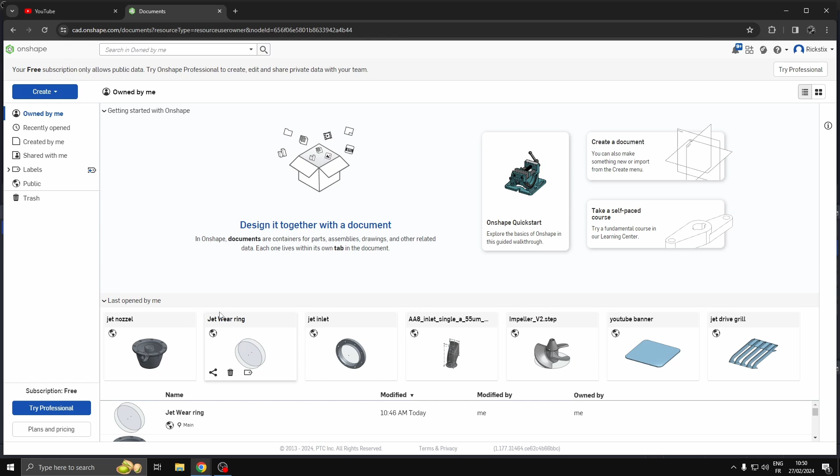Make sure you rename your sketches and planes, because it gets very long and hard to tell which is which. I've just created another plane here, front diameter, slightly smaller because it tapers ever so slightly, but I've got to test one of these out after.

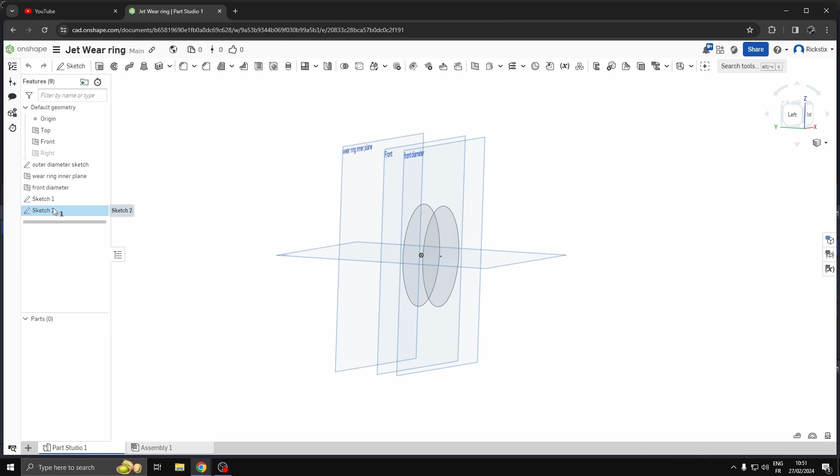I've gone into sketch 2 here, and we're already on the plane, and I just want to match the size, 6.8. Back into sketch, center point circle, click on the cube to realign yourself, just draw your circle, click off, then put in the dimension.

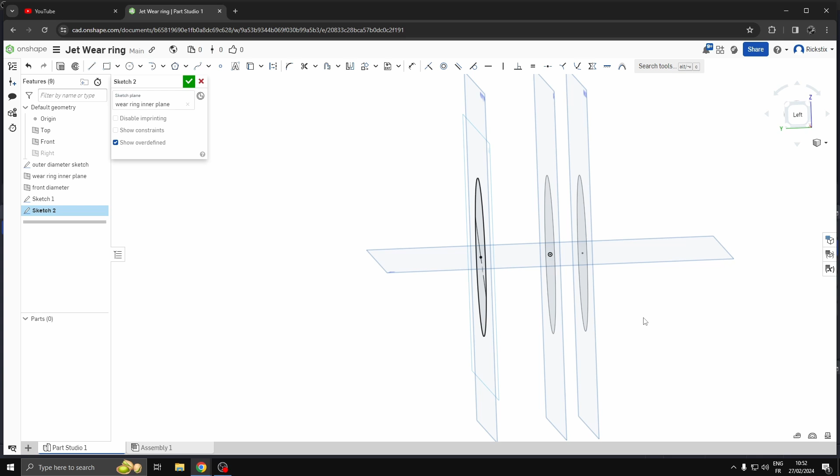I've basically got inside the jet drive about 3 centimeters going in, and 1.4 centimeters coming into the nozzle with an ever so slight taper.

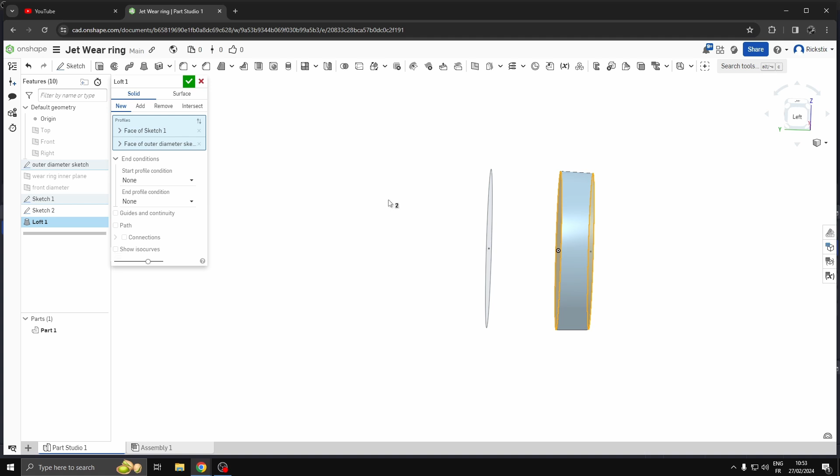We're done with our sketches now. I'm just going to hide the planes quickly. Let's try a loft, see what happens. Okay, that's our first little loft - you see that slight graduation there. Okay, we'll do that one loft like that.

Another loft from the rear plane, from the edge, and we've added our straight piece, so the impeller can be nice and straight in its housing there.

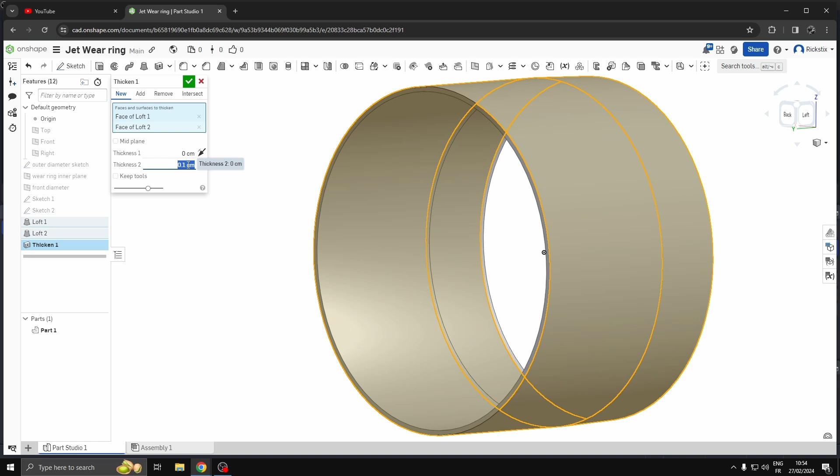If I come back to here, I'm going to go to thicken, 1 millimeter thick. We'll live with that for now. The inner diameter will hopefully be correct for the impeller I'm going to be printing.

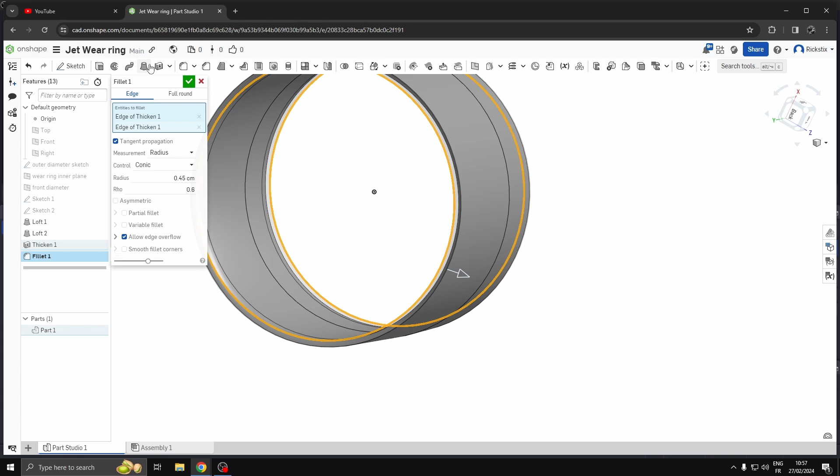We're going to fillet this front edge as it goes into the jet nozzle - I want this to be flowy. We'll try that and give it a go, guys. I've designed myself an inner bearing for a jet drive.

I'm going to export this out. I'm keeping it in millimeters, so I'm exporting that now. I can go straight in here.

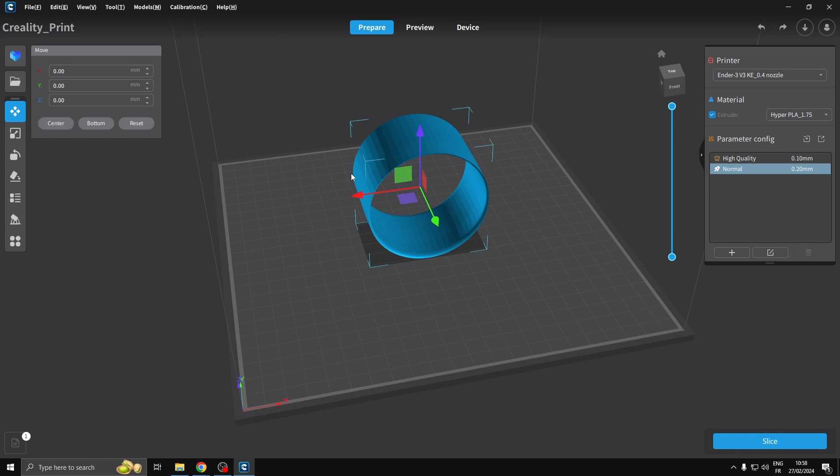Okay, there it is, now we're in the Creality print software. I might as well take you through a few things. It'll give you the part already laid out however it was laid out in Onshape or whatever program.

Down the side here you've got a few options. I normally choose what side I want up - so this will be the bottom, going straight and then into that taper. Okay, so we've got that going on.

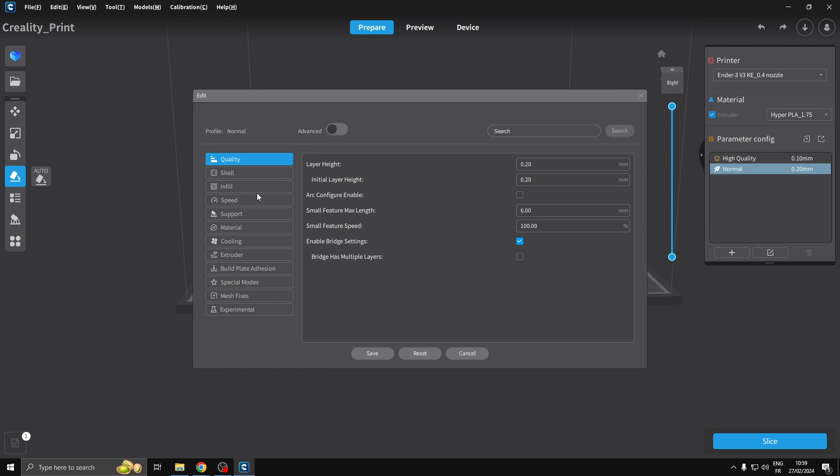Then you can add supports - this doesn't need them, but you could use automatic supports. I prefer going into edit down here, where you've got all your settings: quality, shell, infill. Now I'm going for a density for the bearing.

For the first test I'm going to keep it at 5% infill - I'm not sure it's going to do a lot of infilling. Let's move that up to 15 just in case it infills between. We'll go with lines, and then speed - I can go fairly fast, 150, I'll keep that on.

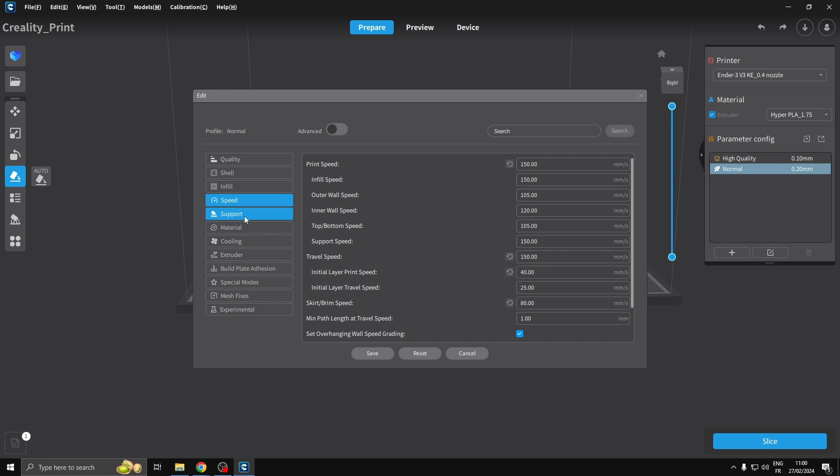Supports, I don't need them. Materials - that's your temperatures, I'll keep it at that, and 60 seems to be okay. Cooling, you've got it all in here.

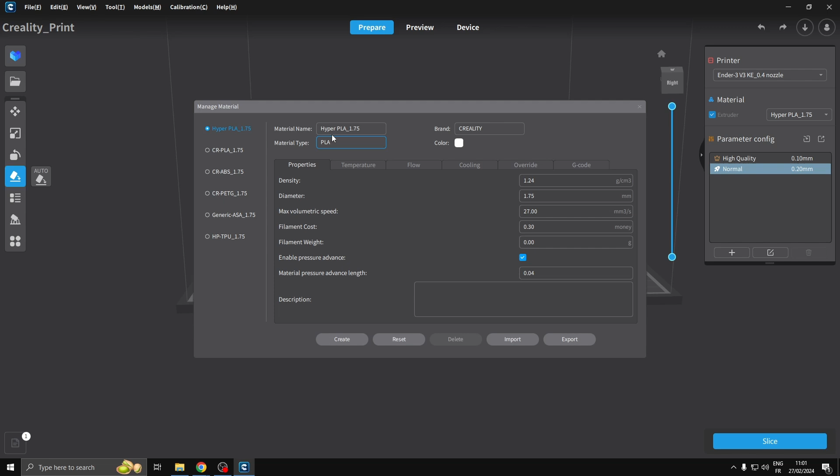Make sure you save. Go into this little edit button here, that'll take you into your settings. If you're choosing PLA - I'm on hyper, I've changed it - but you've got different settings ready to go. If you go into managed, you've got even more options with the PLA flow.

This is kind of important. Anyway, I'm going to keep it on hyper PLA, it's just normal PLA, but it seems to work for now - I'm getting decent results. So if it ain't broke, guys, don't fix it. And then up here, Ender 3v3, you've got your actual printer.

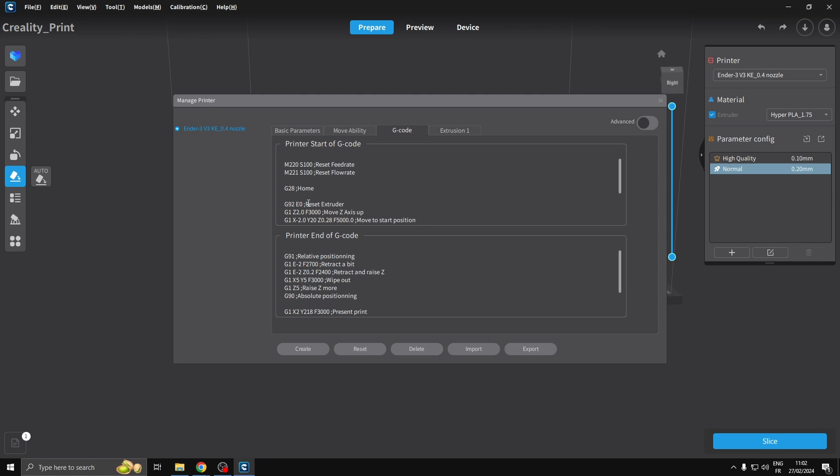You can manage the machine itself - you've got your G-code there, you can write in some different stuff. Extrusion, nozzle size, nozzle diameter 0.4 - that's important to make sure that's set right, depending what nozzle you're on.

These are kind of quick settings down here. Others is quite good when you want to mirror something - you've got your mirror tool. Drill, I haven't used. Distance, measure some stuff - it's all there. It's quite a good little program, seems to work well. It's already got my Ender 3 V3 KE profile, so that's cool.

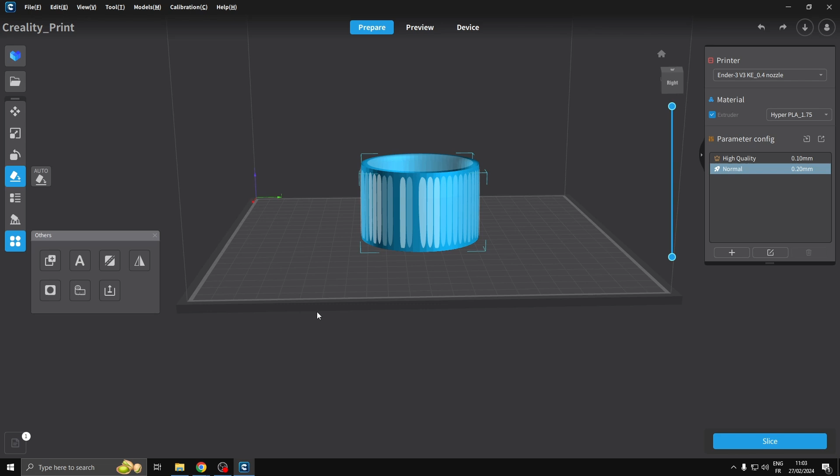And then once you're ready to rock and roll, go to slice. Okay, you'll get a preview - nothing special with this, just a simple dimple.

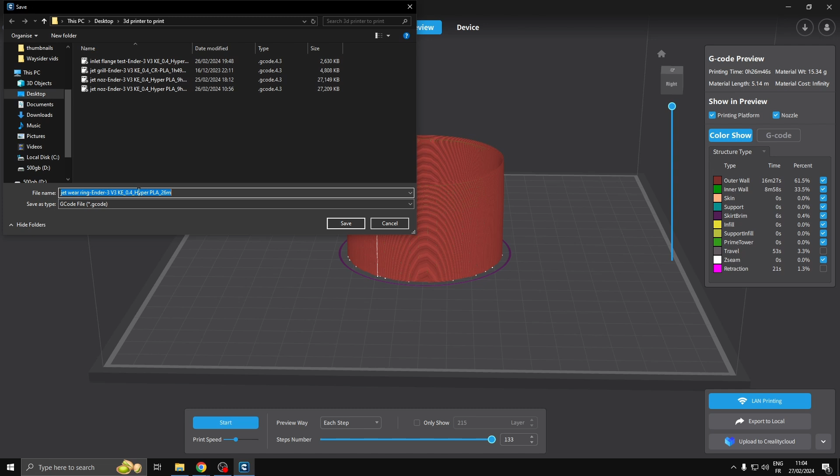Anyway, I'm going to export that now - enough waffle, guys, eh? It goes straight into my folder. You can set that up where you want it to go, and it goes straight into this 'to print' folder. Finish and open, right? And then the next step, guys, I'll be copying and pasting this into the USB key on the Creality Ender 3 V3 KE, and printing this bearing.

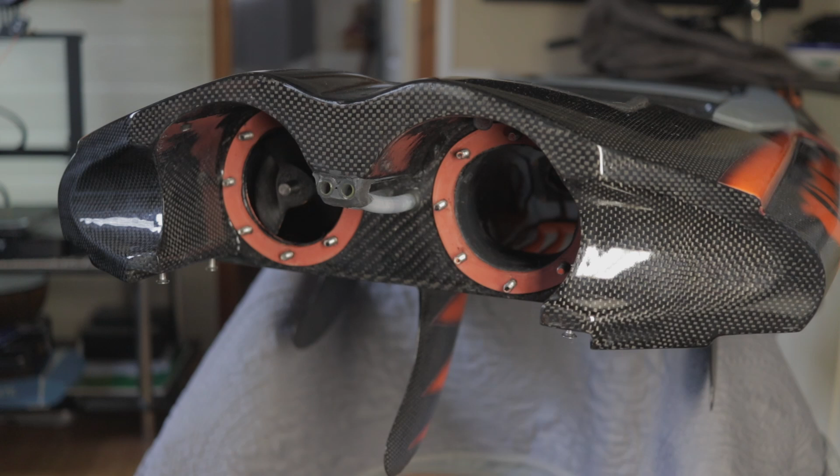Alright, here we are. There's a bit of a lip at the back, so it's a little bit tight, but with a little shave it'll go right in where I want it. It needs a little bit of an adjustment in the software, but I'll get that. Even without that lip, it would slip in there.

If I can print another one that doesn't squidge at the very beginning - there's a bit of a squidge there. It's a test, and I can go in, rearrange a little bit here. I silicone'd this drive because it was leaking, so that's all grippy, which isn't great at the minute, so I need to clean this up, sand a bit, print a nice one of these, and that should slip in there beautifully.